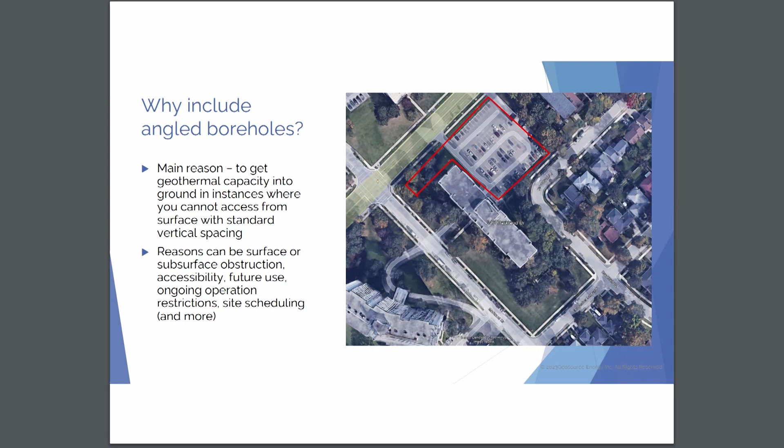We are looking at a Home Depot in Ontario where they're looking at doing a retrofit where we come in from the backside, drill everything out under the building, could be out under the parking lot, whatever, and they still can keep doing what they're doing every day, making money, servicing their customers while we do the drilling work, bring it in, and get the building retrofit. So there's lots of reasons to do this.

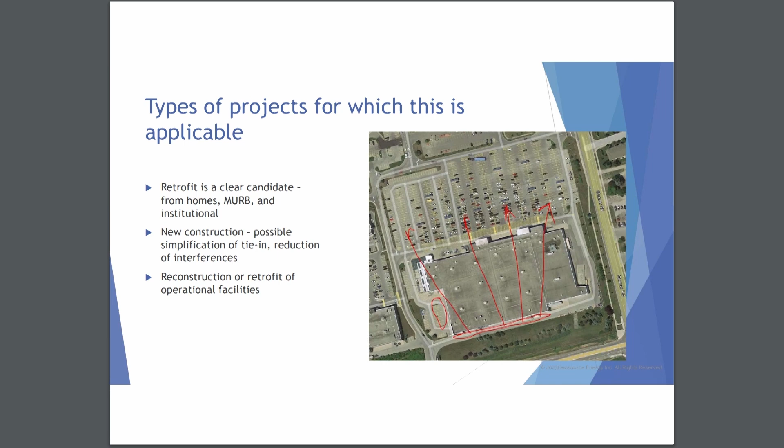One thing I was going to say - if you aren't sure, ask. Don't ever say no to Geo until you've asked, because there's a lot of things that we do that you're not necessarily aware of, and it's changing very quickly.

There are a few things that are probably critical to angle drilling, outside of keeping your holes as straight as possible. Mast orientation - you've got to be able to position that mast. In this case, we now operate rigs that can position side to side, front to back, giving you a lot more flexibility in the direction you're drilling without having the machine necessarily in the position you need to get that hole in the right direction.

Positioning becomes a lot more critical because not only do you need to go vertical with a pinpoint, you need to start at the right location, end at the right location, and point it in that direction. Orientation - vertical is easy, but angled you need to have dip and direction. So those are a little more critical.

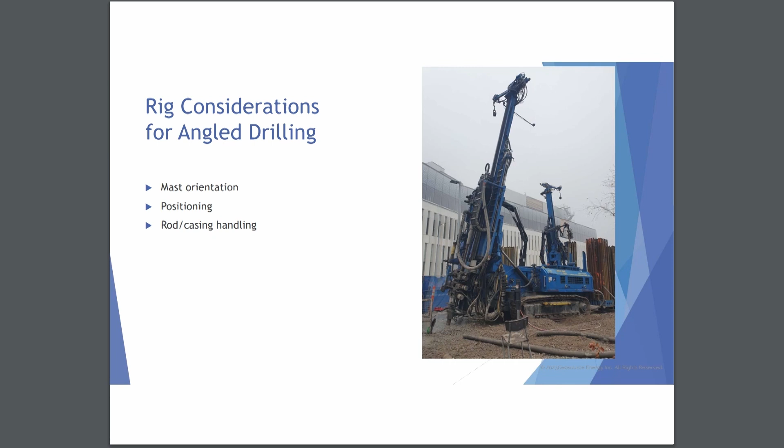And then casing and rod handling - when you start drilling angle holes, everything's out of alignment with the way you handle your drill rods. So if you have a winch, everything gets loaded vertically, and you're trying to bring it into something that's on an angle, so how you do that becomes critical. In our case, we use a lot of machine handling to do that.

I just wanted one example here, and that'll be it, I'll get off. This is a job in Mississauga, which is near Toronto - a federal research facility. What they do in there, I don't know, I'm not allowed to know, but we did the geo there.

When we went in, when it was designed, it was supposed to be vertical, but there was just so much stuff in there to work around that we finally said we have to go angled. Can we do that? Can we propose something? And the engineer looked at it, we put something out to them, and they said okay, we're okay with that. So that's the direction we went, and you'll see the next picture why.

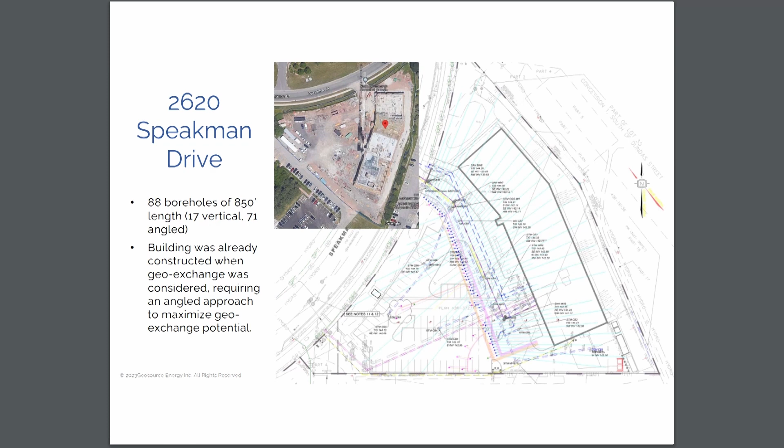This is a retrofit situation, which we'd see as very common for this type of application, where you'll see in the next picture really what happens. So this is a picture from about 3 days ago.

On the left side is that same drawing from the page before. The lines are all the angled holes, and then the blue or purple dots are the top of the boreholes. They fan out in both directions, and then the main header trench runs down the middle of those. You're looking from the top of that trench along there, and you can just see all the other utilities we have to work around. I'm sure you can speak to that, how that's not uncommon pretty much anywhere you work.

What we're trying to do is get everything as compact as possible to get as little trenching as possible on the tie-in. So someone asked me, is it more expensive to do angle holes? And the answer is yes. From the drilling perspective, it's probably about 10% more, and most of that's related to positioning of the rigs and getting them onto those holes, because that takes time.

But what costs extra on the drilling side costs less on the tie-in. So from a cost perspective, not always, but there's a lot less pipe going in the tie-in, a lot less trenching, and a lot less stuff to work around. In this case, we work around electrical conduits and storm sewers and sanitary lines only once, not every time you go across it because you went out over the whole parking lot. This building is also operating, so there's people working in there, so this work can happen while that is happening. Anyways, that's kind of an overview of angle drilling.

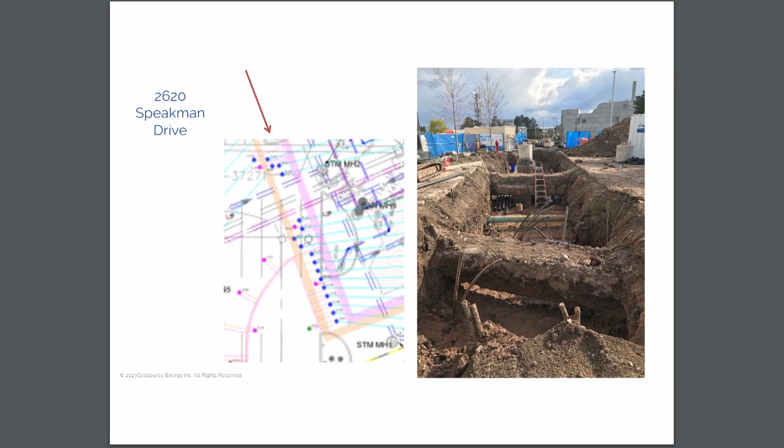Thank you, Dave. I think I hit down for you. And there you go. Okay, let me just check it out. Okay, thanks a lot for the chance to present.

Dmitry Kuravskiy. As Dave mentioned, I'm basically coming from an oil and gas background. I've been drilling wells in oil and gas for the last 15 years in the Middle East. The deepest, probably the longest one was 45,000 feet. So now we're basically trying to combine all this knowledge and bring it to geothermal. And I see there is a lot of cool stuff I can bring here to make it more effective and to achieve way better results.

And here in Celsius Energy, we propose one of the solutions which implements some of the solutions from oil and gas: basically the star topology approach, when we're going with angled drilling. In Celsius, we're proposing a star topology solution where we're using angle drilling in a new featured way, drilling all the wells from a central position, which is one more step further in terms of applying the angle drilling approach.

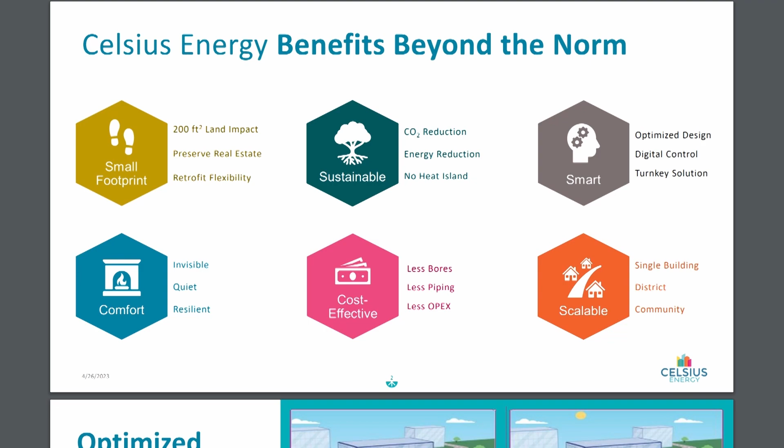We still need to be mindful about the bottom hole area. So if you occupy small space on the surface, you still need quite significant space at the bottom to be able to place all the wells. You need to place your wells inside this cube, inside your location property limits, correct?

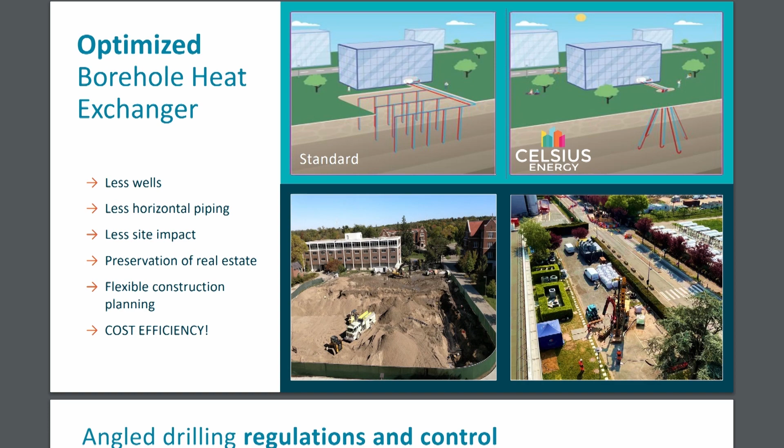And this is basically where we're coming next. When we talk about angle drilling, we're looking for some regulations or standards to be applied here, because to be honest, we've done angle drilling for some time, it looks like.

On the left side, you see an example of 2 vertical wells drilled recently in Massachusetts, or Connecticut. As you can see, the dot on the bottom is basically the target, which is a 25 foot radius target we're trying to hit. But none of the wells actually hit it. One well was roughly 40 foot away. Another well was around 180 foot away.

The only way to find this out is to run the surveys. You run special tools and survey the well to figure out where the well is actually placed. This current step is kind of missing from this equation, correct?

So to be able to deliver the well vertically, or at an angle, is becoming even more complex, because you're actually fighting gravity affecting the bottom hole assembly while drilling. You need to apply much more engineering in designing the assembly, special stabilization techniques and special tools, which help you control the trajectory by optimizing the bottom hole assembly with special placement and tools.

You're able to achieve your required tendencies — we call it bottom hole assembly tendency, correct? Your tendency can be dropping or building, meaning the assembly is gaining angle or dropping angle. At the same time, your tendency can have a walk tendency, when the BHA, bottom hole assembly, is moving left or right. So all these four tendencies you need to address, and make sure you are in control of all of them to achieve your target.

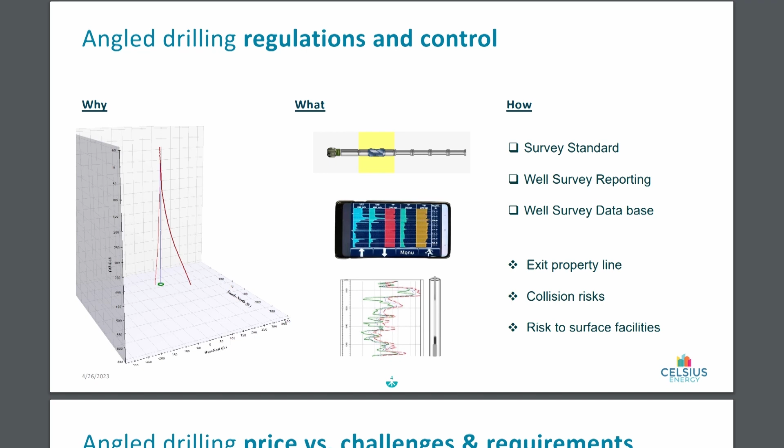Moving forward, understanding there is some complexity, and touching on the complexity of angle drilling, I decided to bring a few points, not to be too scary, but these are things that really came to my attention when I first started working on this project.

First point is when we're drilling at an angle, we start to encounter something called drag forces. When you drill vertical, your rotational weight of the assembly, and your weight when pulling or running the assembly inside the hole, is almost the same, so it doesn't really deviate, which is easy to work with. The problem is when you deviate and get an angle, you start to deal with drag forces, and drag forces always work against you, correct?

So for example, if you're drilling ahead and reach a total depth of 800 foot, and now you're trying to pull out the assembly, the problem is instead of a weight of the string of, say, 10,000 pounds, you'll need to pull at least 14 to 18,000 pounds because of the drag forces acting against you. This leads to the fact that you need way more powerful rigs compared to the traditional approach to achieve similar depths in terms of design and execution.

On the other side, which gets even more complex - if we talk about drilling, it's kind of okay, you have power, you have a rig, but when we talk about completion, this is where the geothermal world gets way more complex, because you're using HDPE pipes, and these pipes have almost no buckling resistance. So right now the industry uses an approach where they try to push the pipes inside the hole.

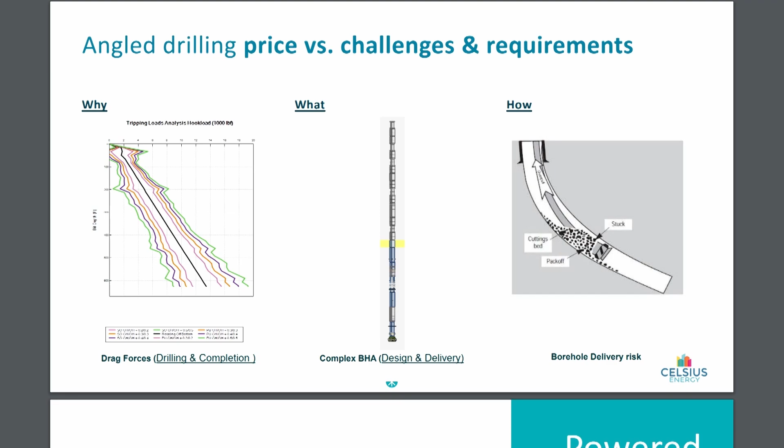That's a lot of information to digest. But it's great to hear that people are thinking about what could be the impediments to furthering this technology, this way of normalizing installation in these systems, because drillers have to do this work. It has to be standardized. There has to be procedures put in place, process, right? There's process to everything that's done in construction generally. So these innovations are going to take some lessons learned.

Next, I'd like to introduce Mr. Stefan Swartling. Stefan and I have worked together for a few years now. Stefan, you didn't give me a bio, so I'm just going to wing it. Stefan and I met at a NY-GEO event, actually, about half a dozen years ago. He was working for a company that manufactured specialized drilling equipment. And from there, we just started to bring technology that he was instrumental in developing in Sweden to the United States. I'm going to hand this off to him and let him riff on his slides and give you a little background of what he's done in the past with his colleagues and what we're doing together in the future.

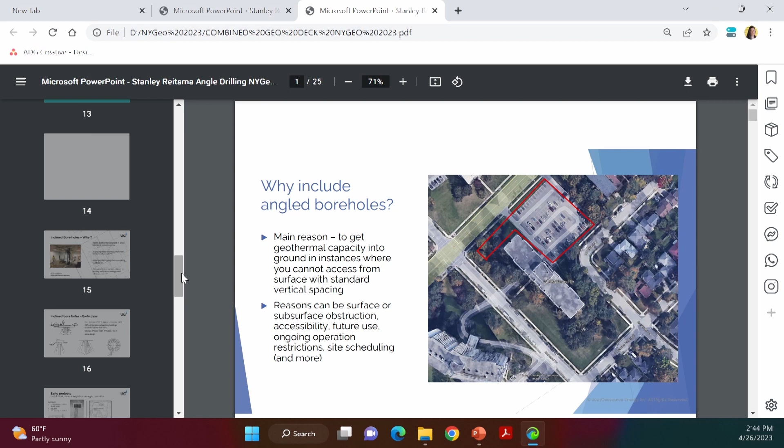And so a lot of technology, a lot of tooling has been developed for these kinds of industries, which I think geothermal could benefit from.

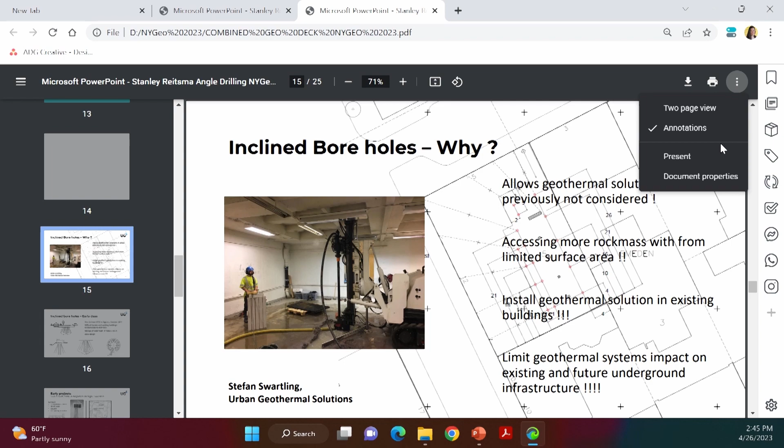Keep going, yeah, okay. So I think the major twist in my presentation would be not accessing... Oh, we're fine, okay. I never did it as a stand-up comedian, so I'm glad I have some support here.

As you can see, most of the arguments for why we would drill at an angle, not straight, is the same thing Stan mentioned. I think it can increase the geothermal market quite extensively, not having the limitations of just drilling vertical boreholes in a field. You can come closer to buildings, you can come inside buildings, and depending on the drilling method you're using, you can also take all the laws and regulations into consideration.

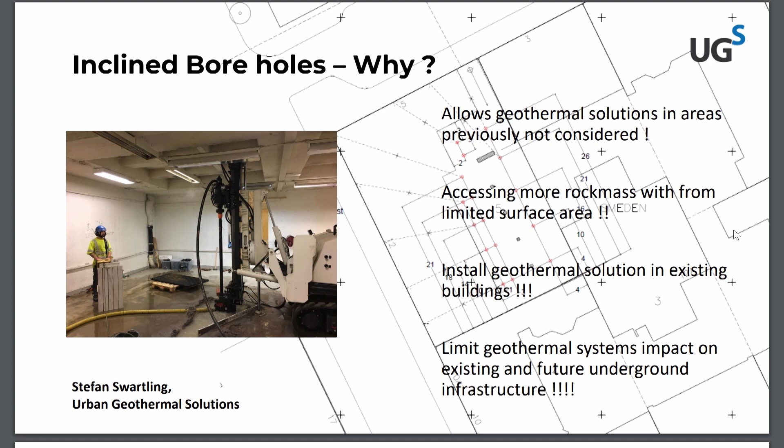So now what's the trick here? Was the arrow. Yeah, and Dave was also nice.

He mentioned one of the first inclined borehole projects that we know of. It was in Sigtuna, 1977, and Göran was part of the design team there. It was angled drilling, not very deep holes, but the reasons why they did that was difficult access to the area, and also it was storage, heat storage for solar. That's what we're talking about now. This was a few years back.

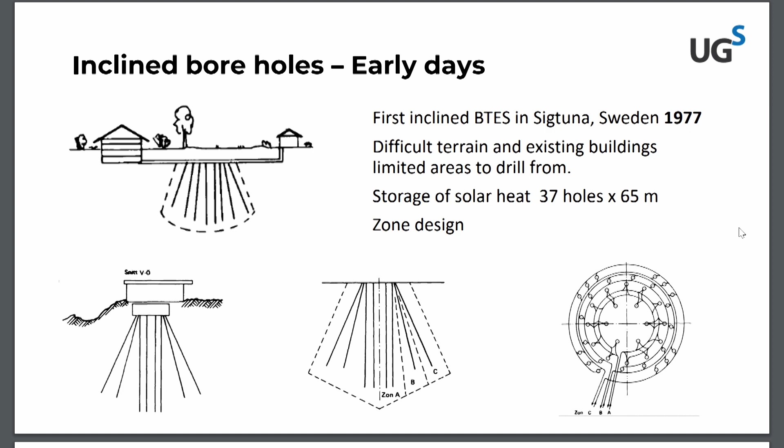Another interesting aspect of it was the zone design. If you look at the picture in the lower right-hand corner, that's how the actual configuration of the holes was set into the ground in between these buildings.

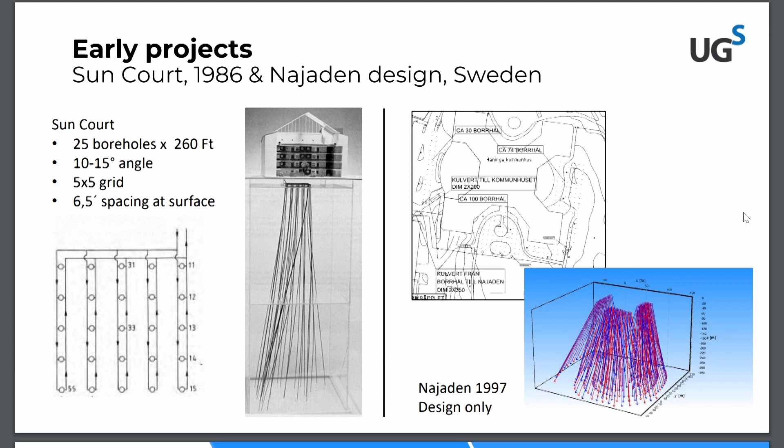One additional point which should be made here is, of course, we can drill the holes, but you have to have somebody design the actual borehole system before you can go ahead and have the approvals and be confident that the system actually works. I think we have the evidence that it works - we've done, I'm guessing, hundreds of them, at least 100 in Sweden.

Here's another project, a data center. We talked about data centers in one of these breaks. They're massive producers of heat, they need cooling, so geothermal is a fantastic solution for that.

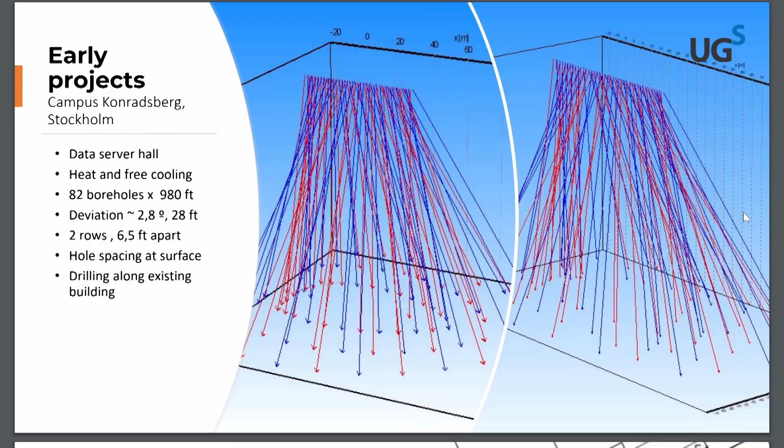Another area where inclined boreholes have benefits is drilling inside buildings, of course. You have existing buildings, you want to go geothermal, carbon-free, everything.

This is a project we did, with water hammer technology - 16 holes in the basement of a building in the middle of Stockholm, using a low headroom rig. On the drawing to the right, you see we're aiming at the borders of the property to fit within the rules and avoid any issues with the city or municipality.

In this project we also tried a lot of new technology, looking at what Dmitry mentioned - control over the drilling parameters, but also smaller hole size, as you can see. It was only a 3.5-inch hole, with some special looping designs as well.

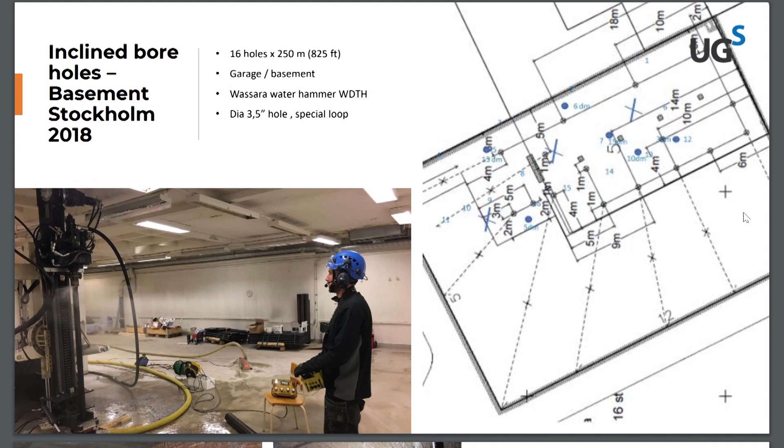And this was another project under a shopping mall in Gothenburg, Sweden. 80 holes. It was an old bowling alley. The holes are, I think, close to 200 meters. And today there is a grocery store built on top of this, and that was also done with this water hammered DTH drilling technology. As you can see on the drawing here, you see the design of the system, and Göran actually did the design of this as well.

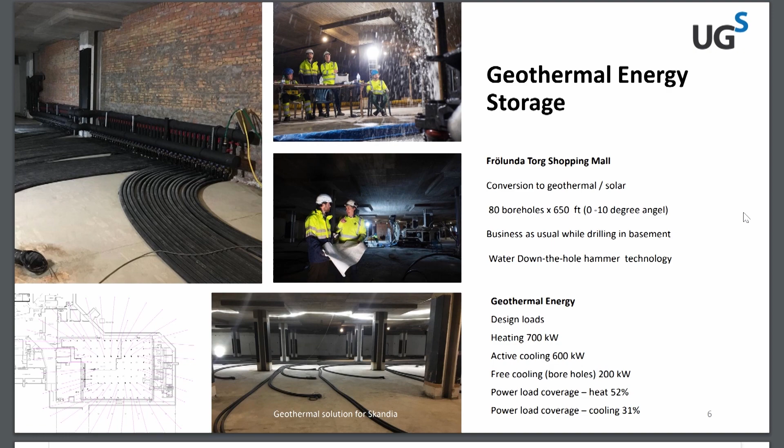This is quite interesting, I would say. It shows you a number of inclined boreholes. This is city center Stockholm, apartment buildings, and they have permission from the city to do inclined boreholes. That is absolutely nothing new, nothing they even think about while drilling at an angle. You have to do it because you can drill from a courtyard inside a condominium or a residential area, on the pavement, or in the basement, as you saw.

I'm showing these pictures, as you understand, just to sort of think, okay, we can actually install geothermal in so many more places than we're currently doing.

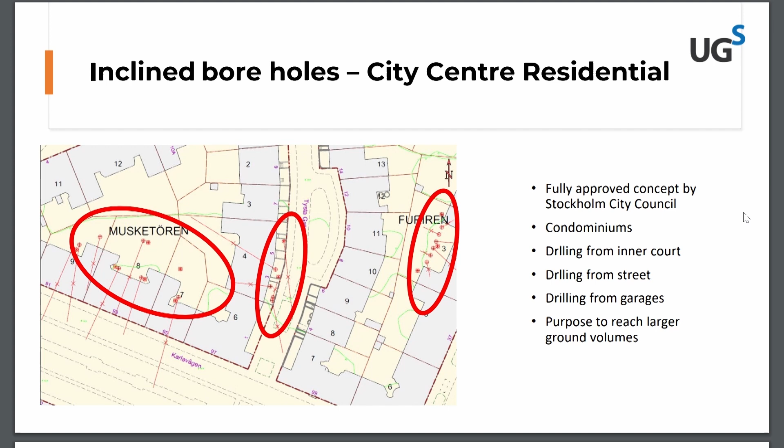Actually, this is a project that is ongoing just now. This is in Copenhagen, you see at a 10-degree angle. The rig is maybe not the optimal one, it's diesel-driven, so we have to channel the fumes out of the building. But this is also a water-powered DTH hammer, so it has water driving the hammer by a high-pressure pump. Talking about cost, we understand that cost is slightly higher to set up a drilling site like this, I'd say almost twice standard drilling, or even an angle drilling situation. And as you know, these things also come with a lot of discussions with authorities, permits, and these things, so that's a big part of the projects themselves.

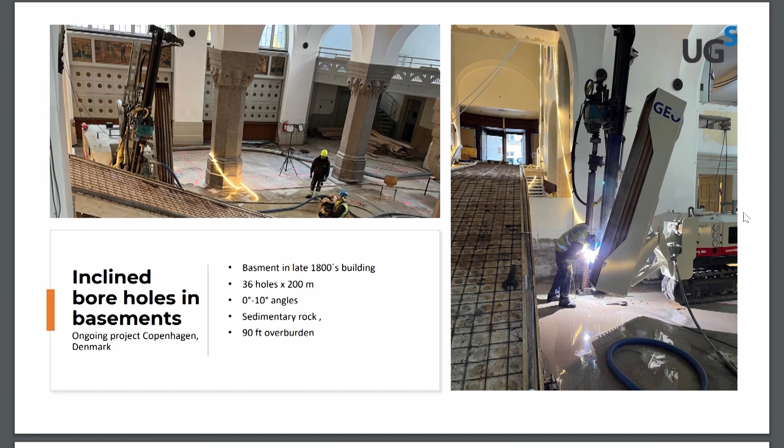I think this has been touched on before, but there's a number of things you have to watch out for to make these as cost-effective as possible. You have to have the right equipment, the right bottom hole assemblies, the right operators, and you have to follow the rules and regulations.

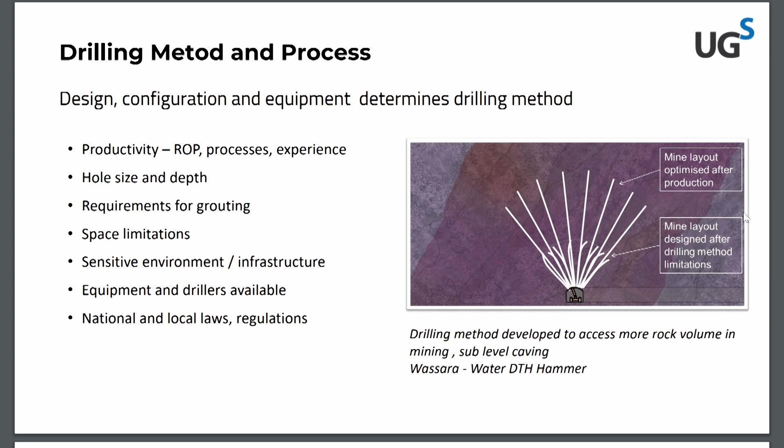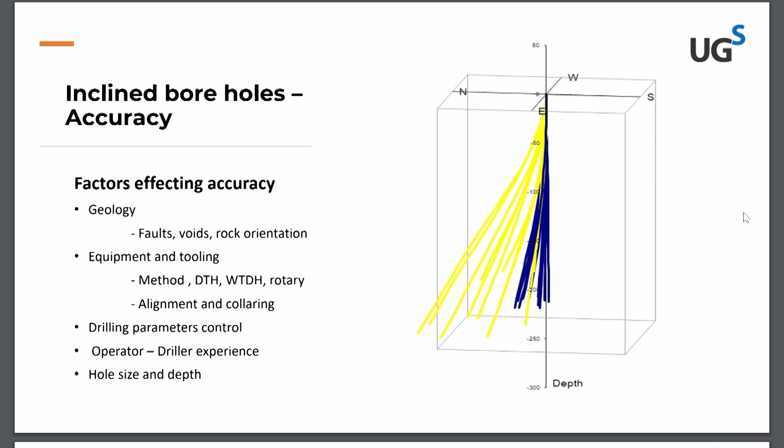What else do we got? Nothing more, actually. Yeah, I hope that was a sort of a little bit of a mind opener. Thank you.

Thanks, Stefan. I think we have a couple minutes for questions. I have some softball questions I could ask these guys, or you guys could really hit them with some hard stuff. Any questions for the panel? I'll start left to right. I don't know if we have anyone to, I can do the. I got it.

Thank you, thanks Stefan. Kevin, I think this question is for you.

Question for the whole panel: with angle drilling comes a requirement for running surveys. What does that look like operationally? Are you drilling X amount of feet, then shooting off a survey and continuing to drill, and shooting another survey? Does it involve tripping out of that hole to run the survey? What does that equipment look like?